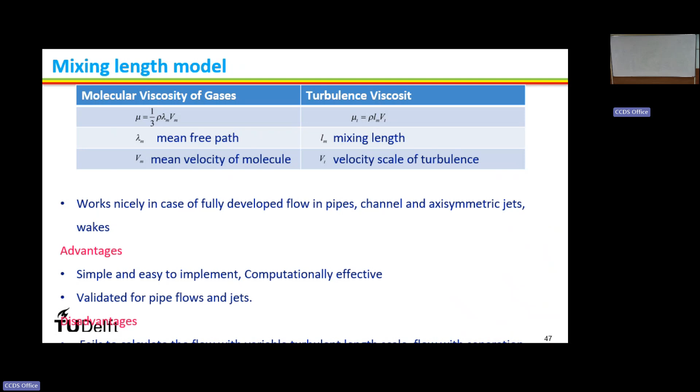So he assumed the mixing length, but even after the approximation, the mixing length is not just a known quantity, right? You have to do a lot of analytical derivation and calculation. Then for a particular problem, you get the mixing length in terms of its characteristic length. There are a few simplified models, right?

Just like flow across the cylinder, where in the wake region you get the mixing length in terms of the width of the wake, right? Or the boundary layer flow, or jet spreading, or the mixing of two shear layers. For them, you get some empirical data for the mixing length. But this empirical data is only applicable to those problems. Even if you change the problem a little, instead of the circular cylinder you put a square cylinder, the mixing length model is not going to work, right?

Then what to do? Turbulence is generic in nature, right? It is everywhere. You cannot enforce that for this geometry, this mixing length works. We have an infinite number of geometries and situations. We cannot always find a mixing length for every problem, right? Then subsequently what happened? Okay, so we covered the law of the wall.

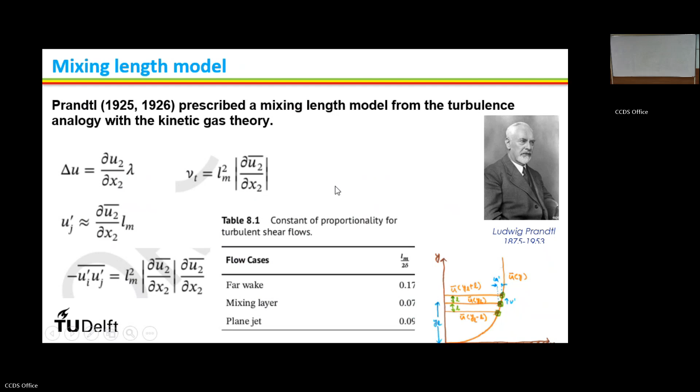Yeah, so come over here.

So that was the limitation of Prandtl's mixing length model, right? There were subsequently many attempts to address those shortcomings, whether there is any way we can more precisely determine the turbulent eddy viscosity without finding a particular mixing length for each particular problem, right?

So around 1945, Prandtl, instead of solving an algebraic equation, solved one additional differential equation for turbulent kinetic energy, right? That is called a one equation model. For mixing length, he was not solving any additional equation. It's a zero equation model. Out of some algebraic expression, he was finding the mixing length for a particular problem.

That was in 1925. After 20 years, it was Prandtl who first solved the turbulent kinetic energy additional differential equation. It's again a convection-diffusion equation pattern. He solved it to find the turbulent kinetic energy from the solution of the differential equation, right? It was called the one equation model. Again, it had shortcomings. With one equation, there are a lot of unknowns that cannot be found.

So then subsequently there were many more attempts. Can we solve some additional equations, or consider some additional methods, to close the problem? Then successively it came to Kolmogorov, in 1942, who introduced the specific dissipation rate omega, right? Yesterday we discussed what dissipation is, right? Epsilon. Dissipation per kinetic energy.

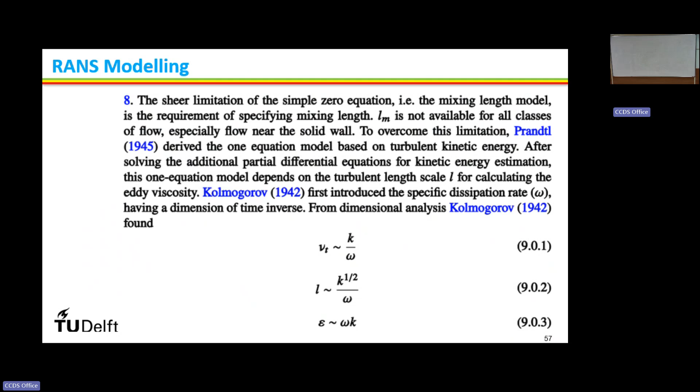If you are finding only dissipation, this omega is the specific dissipation, dissipation per unit kinetic energy. Then what is the total dissipation? Total dissipation is equal to omega times k. Okay. So this is how people started solving a two equation model.

The idea is to find one length scale associated with the eddy and one time scale. What is the physicality telling? This gives pictorially the representation. Suppose this is the eddy; this gives the length of the eddy, right? Then this gives the time scale. Once you know the length and the time scale, you get the velocity, right? The theoretical idea is to find the associated length and time scale with the eddy so that we can find the eddy turnover time. Clear?

So subsequently, in 1945, people started using these two things to compute length scale and time scale. They started solving two convection diffusion, or two differential equations, right? After solving two differential equations, they find some length scale and some time scale associated with eddies, and from the ratio of the kinetic energy squared to epsilon, they found this gives the eddy viscosity, which was the unknown for the closure problem.

Now it is clear. It is Rotta around 1951, right? He developed the new two equation model. That is the modern form of what we call the K epsilon model, right? It was developed around 1950, after the Second World War. There was a lot of research, based in Imperial College London and Germany.

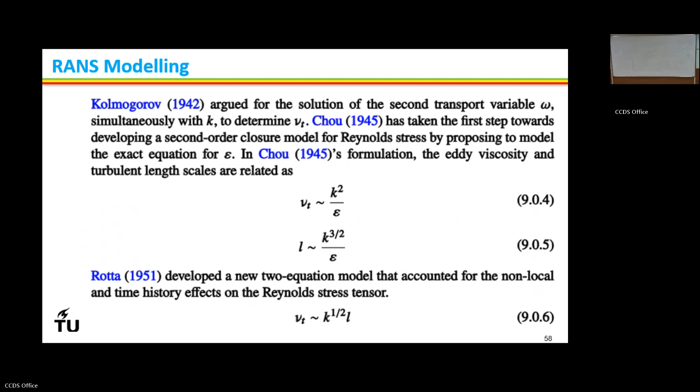So now coming to the simplest two equation model. In 1951, Rotta was involved in the solution of two turbulent scales. In 1945, Prandtl solved one equation for turbulence kinetic energy, right? Instead of solving one equation, in 1951 Rotta started solving two equations to simultaneously determine two scales, a length scale and a time scale associated with the eddies, and successfully closed the equation based on the Kolmogorov hypothesis that Kolmogorov formulated in the 1940s, right?

So the most simplified form of two equation RANS is the standard K epsilon equation. It was developed by Brian Launder. Then Jones and Launder worked at Imperial College. I think Brian Launder is still active. Professor Brian Launder is in Manchester, right? With Kemal Hanjalić and other people. He worked extensively on RANS.

So in the 1970s they came up with the most simple version of the two equation model, which is still in practice for most engineering flows. That is called the standard K epsilon model, right? Last time we solved the equation for turbulent kinetic energy. Have you seen the form of the equation for turbulent kinetic energy? You remember, right?

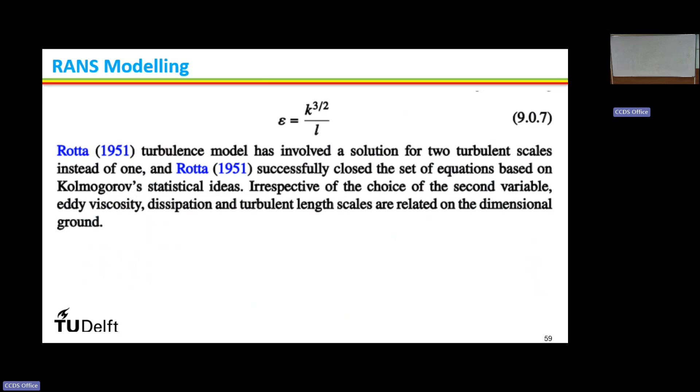So what is this side representing? Here is my turbulent kinetic energy. This side represents the convective acceleration. This is the time variation of the turbulent kinetic energy. This is the convective acceleration of the turbulent kinetic energy. Then, besides the molecular or viscous diffusion of the turbulent kinetic energy, there are additional second order and third order correlation terms which cannot be determined independently, because the problem was open.

You can see, once we derive the exact equation for turbulent kinetic energy, you can find there are additional third order correlation and pressure velocity fluctuation correlation. These are open, these are not known. Somewhere we have to make approximation to close this, right?

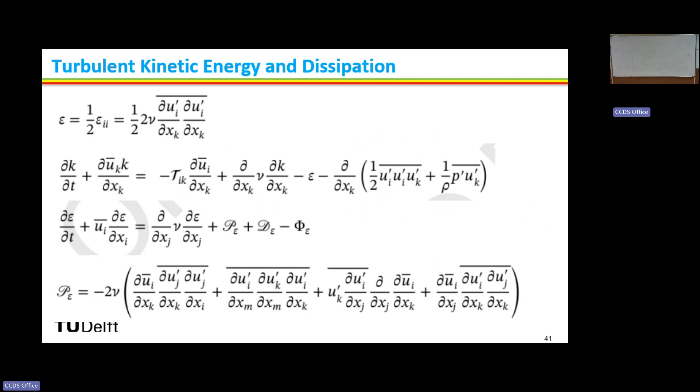To close it, in 1974, Professor Brian Launder and Jones developed the standard K epsilon model. They assume those third order correlation and pressure strain correlation in terms of equivalent diffusion, that is diffused by the turbulent field. Apart from the molecular diffusion, there is some enhanced diffusion. Then they scale those enhanced diffusion proportional to the eddy viscosity times some proportionality constant.

So apart from the molecular diffusion some additional diffusion is there because of the turbulent flow field, and they put it as the eddy viscosity over some sigma k. This is a constant coefficient calibrated based upon the experiment. So all those third order correlation, pressure strain correlation, they dump into the equivalent diffusion term, right?

Once this diffusion term is there, this is the dissipation term, the amount of energy that is destructed or going away from the system. It appears in terms of epsilon, which we already derived yesterday. Then there are production terms. Production means the mechanism by which the turbulence is extracting energy from the mean flow. Based upon the flow situation, the production will be different.

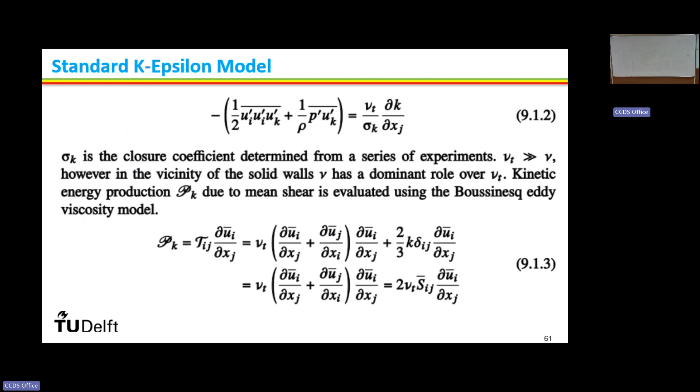We did the derivation for the diffusion term that we have already covered. This is how the production due to the shear looks like. This is the mean strain rate. This is the production due to shear. Once you get this, we have an additional equation for the dissipation. Again, it's a similar advection diffusion equation.

This is the convective part of the dissipation: time variation and convective acceleration in the flow field. This is again the third order correlation, etc., dumped into an equivalent diffusivity in the turbulent flow field, captured with the scale sigma epsilon, a different coefficient. They scale with the eddy viscosity divided by sigma epsilon. This gives the equivalent diffusion, that is laminar or viscous diffusion plus turbulent diffusion. Then because of the buoyancy production, there is some production term also in the epsilon equation.

Then there is some destruction term. At every time step, some amount of energy is continuously liberating from the system, some epsilon going away from the system, dissipation. Hanjalic, Harlow, Nakayama, and a lot of other people in the 1970s who were working at Imperial College, London developed different variants of the K epsilon model subsequently. So this is the standard K epsilon model.

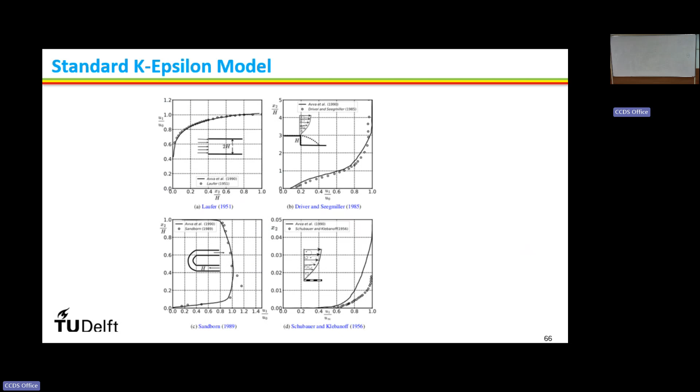After this is a boundary layer profile. You can find there is some deviation between the CFD data from the K epsilon model and the experiment in the boundary layer. In all other three conditions they match successfully. Then people started improving those models based on some statistical theory and other parameters. Subsequently, the realizable K epsilon model was developed.

What is the condition for realizability? The condition for realizability says your Reynolds stress should be positive definite, right? The Reynolds stress is a matrix, a 3 cross 3 matrix, or a tensor, right? It has some properties; some statistical properties should be preserved. What is that? The diagonal terms, the averaged squared terms, should be greater than 0.

Why? Because turbulence kinetic energy is always positive. So if I write the Reynolds stress: tau 11, tau 12, tau 13, tau 21, tau 22, tau 23, tau 31, tau 32.

It says these diagonal terms should be greater than or equal to 0. The kinetic energy should be positive. The square of any quantity should be positive, or not?

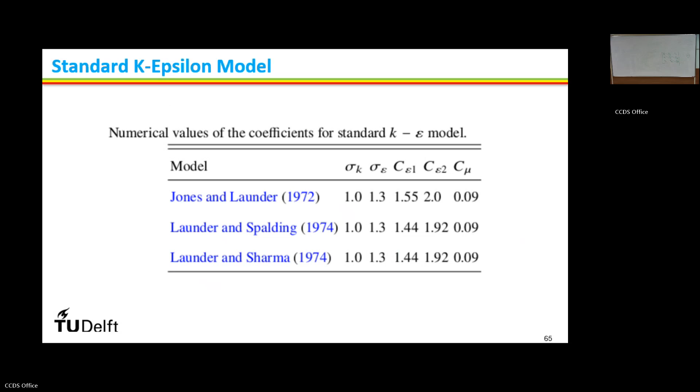In this realizable K epsilon and standard K epsilon, the K equation remains unchanged. There is not any change in the governing equation for K. The K equation looks as it is. So what is the difference? The difference is the epsilon equation, right? They look different for the standard K epsilon and realizable K epsilon. For the realizable K epsilon, there are some new terms that appear.

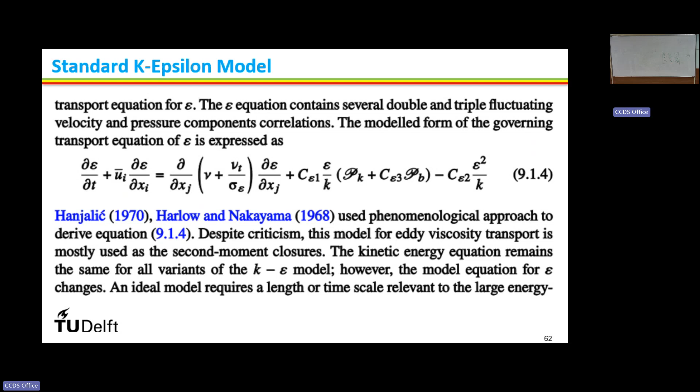This is the thermal buoyancy term. The mean shear term appears in terms of the mean shear rate, right? There are some additional deviations in the epsilon equation. If you compare C epsilon 2 epsilon square by K, C1 epsilon by K, you will find K plus root of kinematic viscosity times epsilon. This term comes additionally inside the denominator, right?

So this kind of modification satisfies the realizability condition for a matrix. That's why they called it the realizable K epsilon model. Clear? The difference between the standard K epsilon model and the realizable K epsilon model: in both cases the form of the kinetic energy equation remains the same. Only the equation for the dissipation changes. Now it is clear what the standard K epsilon model is and what the realizable K epsilon model is, right? Then subsequently, people renormalized the group again.

For the realizable K epsilon model, the way the eddy viscosity is calculated with C mu remains the same as the standard K epsilon model. But for the standard K epsilon model, C mu is a constant, 0.09. For the realizable K epsilon, it is no longer constant. It depends upon some additional parameters. This omega is the mean vorticity, right? These epsilon ijk are called the Levi-Civita tensor, a permutation variable in the third order tensor. Based upon these values, C mu is calculated.

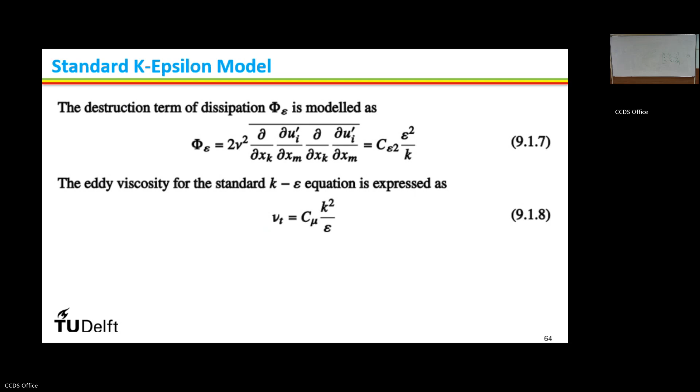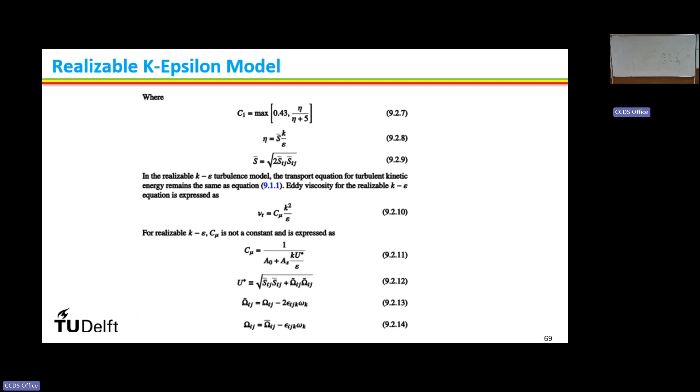For the whole flow field, C mu is constant for standard K epsilon, but for realizable K epsilon, this C mu coefficient that scales K square to epsilon varies in the flow field, right? So this is how realizable K epsilon is very different from the standard K epsilon model. Earlier C mu was a constant 0.09. Now from the realizability condition, we get C mu from an algebraic equation. For that, we have to solve the mean strain rate and mean vorticity of the flow field. So C mu is now a field variable; it changes its magnitude point to point. Clear?

These are how you define the mean strain rate and so on. Now see the shortcomings of the standard K epsilon model and how the realizable K epsilon model works well. This is the experimental data. The standard K epsilon model gave some deviation from the experimental data. The realizable K epsilon model gives a relatively good fit, right? This is for a planar jet. Both standard K epsilon and realizable produce identical results.

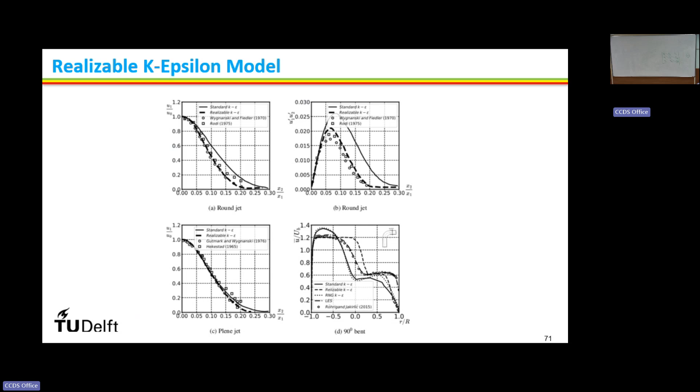This is for a bent tube where the standard K epsilon model was failing completely. The realizable one is close to the experimental data, right? The same with the spreading of a round jet. So within 20 years, there were attempts to improve the K epsilon model developed by Launder in 1974. By 1995, this realizable K epsilon model came into the picture. Clear? Then subsequently, people started doing research.

They developed RNG K epsilon, which is called renormalization, right? Renormalization is a concept in Lie groups, a mathematical concept, mostly understood by mathematicians or statisticians, not much by engineers unless they are very deep into mathematics. Yakhot et al. in 1992 renormalized those statistical variables, and that's why it is called RNG, renormalization group K epsilon model. The good thing is that in all three K epsilon models, the governing equation for K looks similar. The only change is epsilon. So now see how epsilon looks in the RNG K epsilon model.

So here we have a convective term, here we have a diffusion term, here we have a production term due to buoyancy, and a production term due to shear, mean shear. Then the coefficients, which earlier in the standard K-epsilon model were constant, are no longer constant in the RNG K-epsilon model. They are functions of some other parameters which are determined from the mean strain rate or mean vorticity.